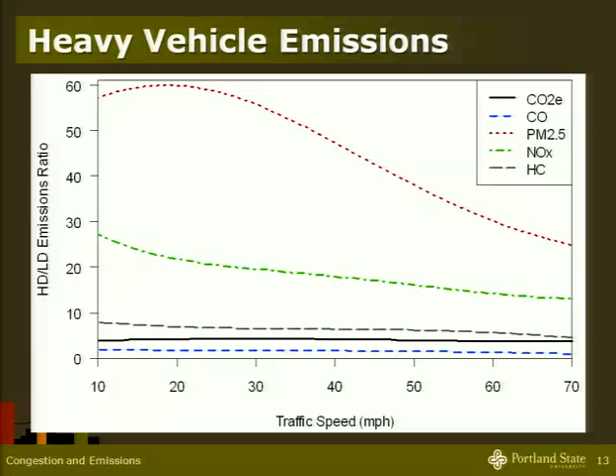This is not just because of the shape and weight of the vehicle—it's also because in the US, heavy-duty vehicles are dominated by diesel fuel, whereas our light-duty fleet is dominated by gasoline. So part of this is vehicle body and engine differences, and part is fuel differences. But there are much higher emissions rates for PM and NOx from the heavy-duty fleet than the light-duty fleet. Also, by the downward sloping trends of these curves, you can see heavy-duty vehicles are more sensitive to congestion—as congestion sets in, their emissions rates go up more proportionally than light-duty vehicles' rates.

Now, how does that impact their role in the total picture? Here we're assuming heavy-duty vehicles are about 10% of the fleet, which is fairly typical on, say, I-5. So if heavy-duty vehicles are 10% of the fleet, here's the fraction of total emissions coming from that sector. We see 85 to 90% of the particulates are coming from just these 10% heavy-duty vehicles, about 70% of the NOx, and almost half of the hydrocarbons. So a lot of the local pollutants are coming from heavy-duty vehicles.

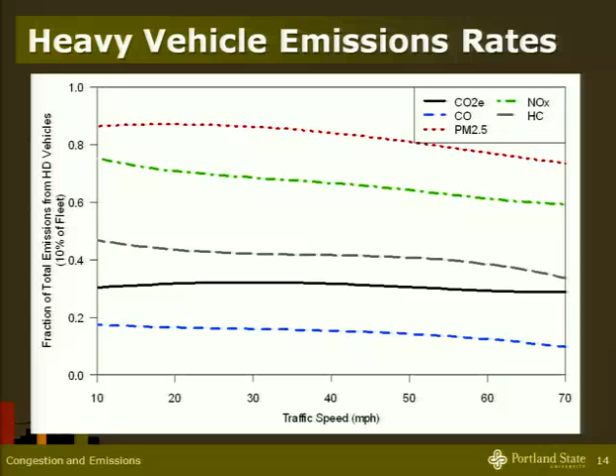So all these sensitivities have led to suggestions for class-based strategies to reduce emissions. This isn't just for emissions motivators—there are other reasons too, like differences in value of time and mobility needs. But there are certainly opportunities for class-based traffic management strategies to reduce emissions better than just general-purpose traffic management strategies.

Here I present results from a sketch analysis study using a typical three-lane freeway, looking at 4 different ways to manage these 3 lanes. TOL is a truck-only lane, dedicated for heavy-duty vehicles, and general purpose is a mixed light-duty, heavy-duty facility. So for these three lanes, we have 4 possible strategies.

The first is a truck-only lane conversion: we take away one general purpose lane and replace it with a truck-only lane, giving 2 general purpose lanes plus a truck-only lane. The second is adding a 4th lane and making that a truck-only lane. The third is adding a general purpose lane, giving 4 general purpose lanes. The 4th is removing a general purpose lane, going down to 2 general purpose lanes.

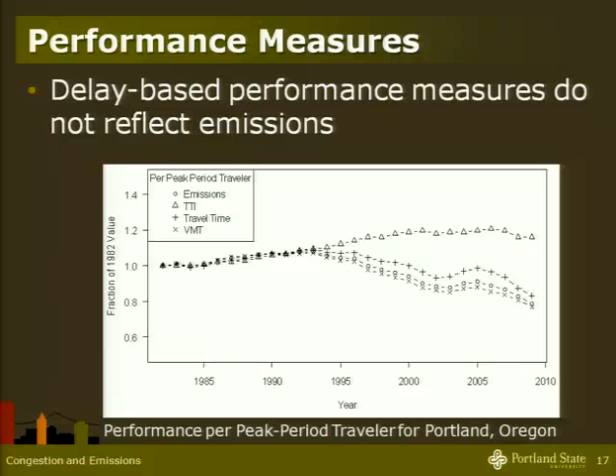Because the changes in efficiency at a wide range of speeds is small, that's only going to have a marginal influence on total emissions, whereas total emissions are very responsive to changes in the amount of travel. So changes in VMT are clearly more reflective of changes in total emissions than simply changes in speed or delay. Congestion performance measures are not fully, or not very well, reflecting emissions changes.

It's fairly easy to see graphically that there's a much stronger relationship between total emissions and the amount of travel than between total emissions and speed, or total emissions and delay. That's because speed is only having small marginal influences on emissions, and it's the amount of travel that's really driving the total emissions value.

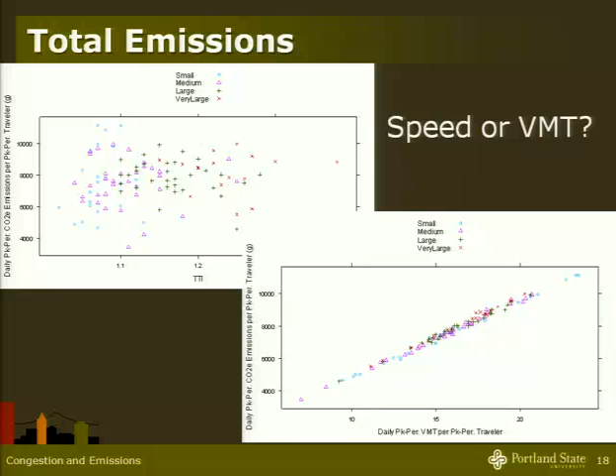Decreasing congestion levels increases speed, decreases emissions rates, and decreases total emissions if you're only looking at the efficiency effects, but you're leaving out a lot of the impact of congestion.

That brings me to something much more recent, ripped out of last week's headlines. There's a recent report from Harvard Center for Risk Analysis looking at the health effects of motor vehicle emissions. This is from a website talking about the report. They say emissions from traffic congestion cause 2,200 premature deaths annually. So they're saying emissions from traffic congestion are causing that — which naturally ties into my research.

I was like, well, how did they calculate the emissions from traffic congestion? What is their base case? If you go in and look at the methodology, they're not actually calculating the emissions attributable to congestion. They're just calculating the total peak period emissions. So really they're looking at the total amount of emissions, and the word 'congestion' really shouldn't be in there because they're not estimating the effects of congestion — they're estimating the total effects of emissions from vehicle travel.

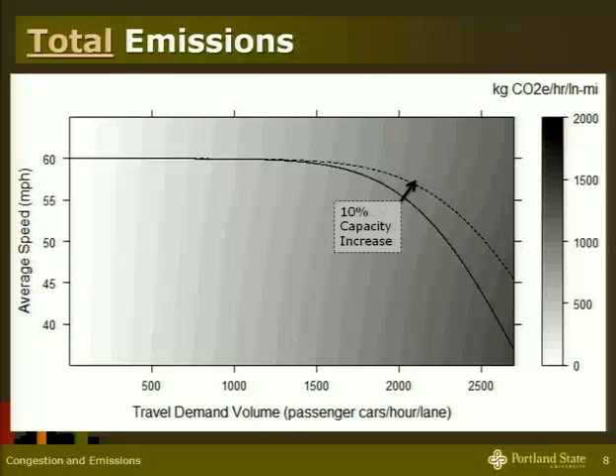Can we go back to that slide? On the far left, the part I don't get is that if it's 20 miles or less and the emissions are just spiking, all those bad gases, doesn't that mean that when people are stuck in traffic, it's generating more pollution per travel mile? Especially in a commuting situation.

Yes, more exactly per travel mile, and that's the issue. If we're normalizing to the amount of travel, then yes, our emissions are going up. But if we're looking at total emissions, not normalizing to travel amount, it becomes more complicated. The efficiency is going way down at very low speeds, and that's why there's good potential in this region for all these pollutants, because efficiency dominates. But across a wide range of moderate speeds, the travel-induced demand offsets it.

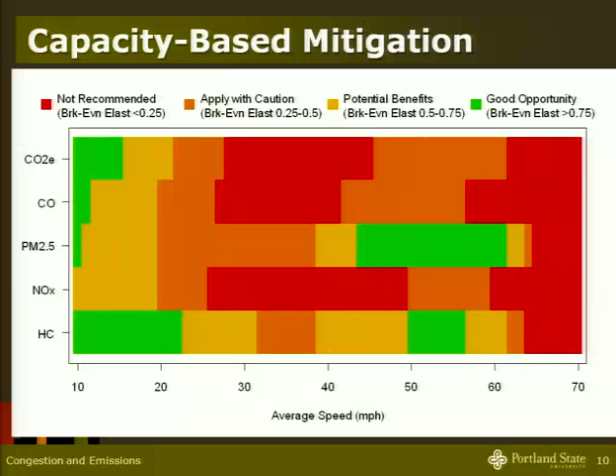That was a really great presentation, excellent work. My issue is with the conversions or adding truck lanes. Aren't you rewarding the worst actors in the system? You're making life easier on the people contributing the most to the problem. Can't we think of a stick instead of a carrot that makes people drive off-peak, do their deliveries during times when traffic congestion isn't bad?

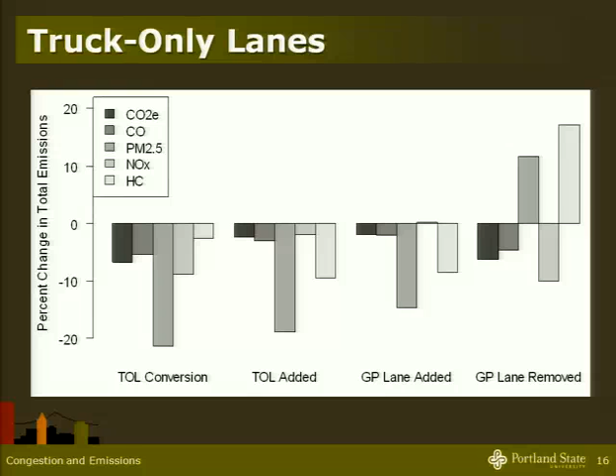Taxation, maybe? I don't want to get too much into what policy approach we should take, but there are certainly a lot of approaches we can take to congestion, and I want to be careful with rewarding or punishing, because we all need the transportation system and we're all using it. There are certainly policies that incentivize certain behaviors, and policies that disincentivize other behaviors. I think this is an example where you have a mix, where by managing our lanes differently, we're changing travel times, which incentivizes travel for trucks and disincentivizes travel for light-duty vehicles.

If you have a congestion pricing system or a VMT tax or some sort of system like that, the elasticity of demand is the net change in demand—the total change in demand. So with a system like that, you can actually reduce the induced demand effect and have an effective lower demand elasticity. You have a better chance of being under these curves if we have a congestion mitigation program accompanied by a congestion tax, where we're increasing efficiency but also disincentivizing travel monetarily to try and have no induced demand. So we can change our effective demand elasticity downward through some of these disincentivizing policies.

Thank you. Or Kelly, did you have a question?

No. Okay, behind Pam? That kind of gets to my question, which is: do heavy-duty trucks have the same elasticity levels as passenger vehicles, given that they're traveling for work, have very different reasons for being on the road, and are influenced by all of our consumption levels, which is a totally different model?

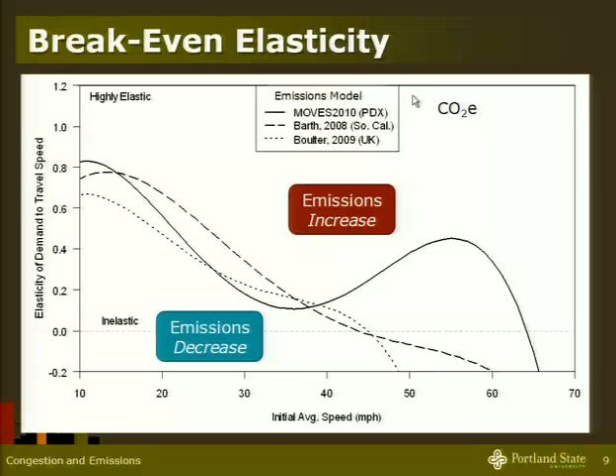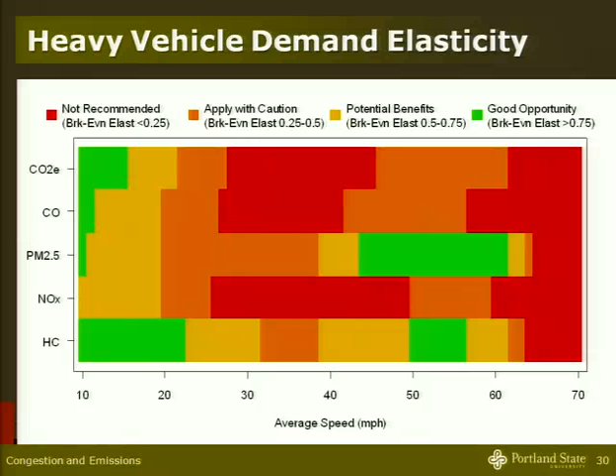If I may, I actually looked at that a little bit. Remember this slide, I said, okay, what happens if freight demand is inelastic to travel time, either because it's intrinsically like that, or we've put some sort of a toll along with our congestion mitigation to eliminate induced demand for heavy-duty vehicles. Here's what the picture looks like for inelastic heavy-duty travel demand - a lot greener overall, a lot more potential for emissions reductions due to congestion mitigation if we can eliminate induced demand from the high-emitting heavy-duty vehicles. Thank you for the question and the opportunity to show my extra slide.

I think Pam, or did you want to follow up?

I just would like to add something - I think freight is very diverse, like Alex said, and you could think about, you could just move gravel and rock or move computers. So the value of the shipment, you have a huge range in terms of value, so the response, the elasticity is all over the place, and it's very, very hard. I think Alex tried to say this - we're just trying to analyze and understand what's going on, so the right policy makers can make the right decisions. And there is a huge range of options, and I don't want to say that freight is guilty, because it's necessary for the economy, and there are not so many options available, unfortunately, in terms of alternatives. So just wanted to make that point, we are not just saying that we should reduce freight or that freight is responsible. It's just with the current technology, unfortunately, this is what our economy is depending on, the way it works.

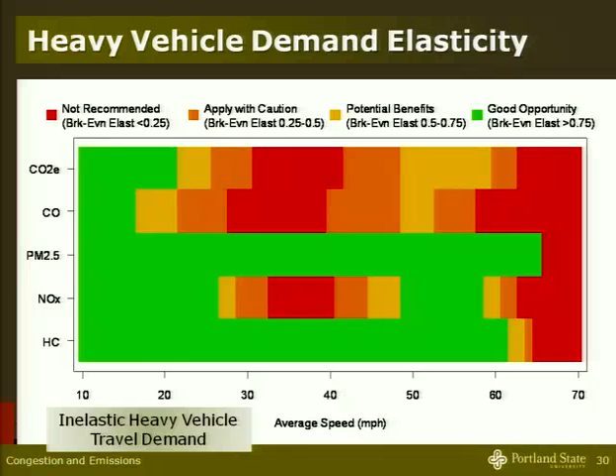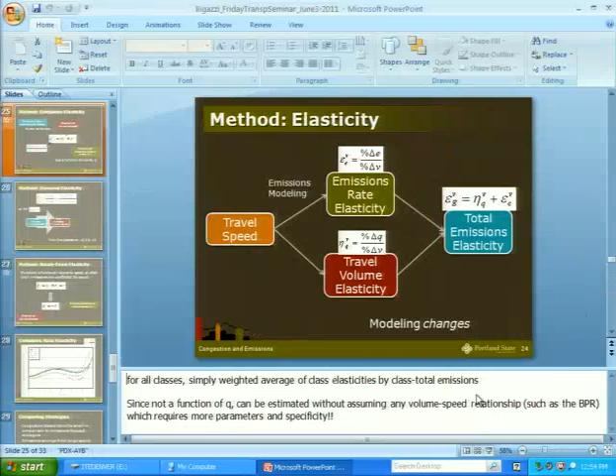After looking at your slides on the urban mobility report and the strong relationship with vehicle miles traveled, could we go back to your earlier slide showing the funding priority breakdown for CMAQ? I'm curious about their land use priority. Is land use on there at all in terms of reducing miles traveled? Let me see—can you give me an example of a project, since this is about funding projects? Like research or regulatory measures to increase density, things like that.

If there have been those projects, it would probably fall under demand management, although most of the demand management projects I saw were telecommuting, carpooling programs, and things like that. I'm not an expert on CMAQ—the list of projects is available, and it would be interesting to see a more detailed breakdown. I think when Atlanta had to form GRTA over their non-compliance with air quality, they were trying to get credit for land use policies, and this was a challenge—how do those fit into this funding arena and get credit for the benefits. I think it's something that's evolving.

One of the hard parts about doing that would be showing an expected benefit on both sides, because they've been tied together like this.

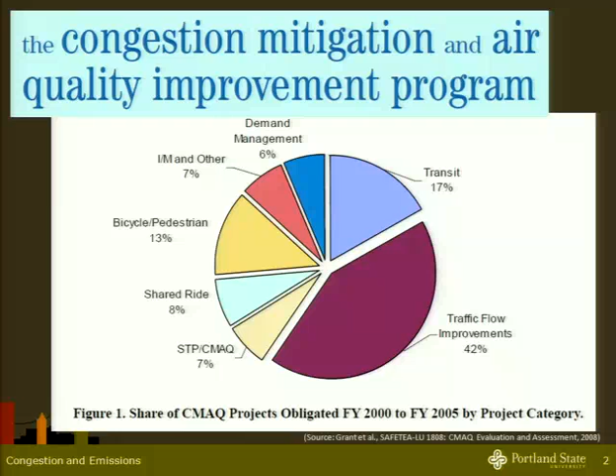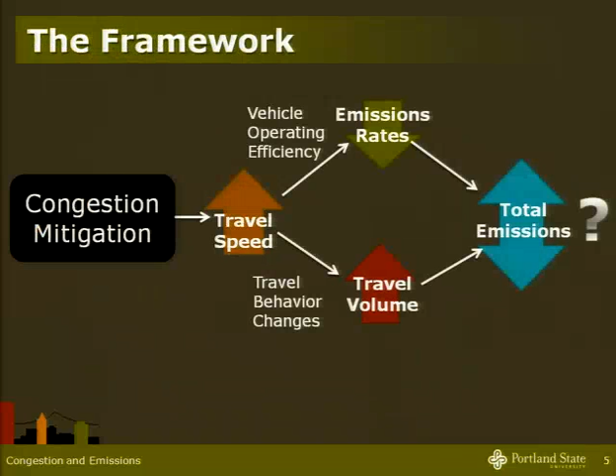But related to other countries' approaches—through a lot of this research, when I say congestion mitigation, colleagues in the U.S. typically think of traffic flow improvements and capacity expansions. Colloquially, that's really what we mean—capacity or throughput improvements. When I mention my research to colleagues in the UK, I always have to say capacity-based congestion mitigation, because to them congestion mitigation first implies demand-side congestion mitigation with additive benefits, since they're much more restricted in their ability to add capacity than we are. I'd say that in terms of the mental framework, they're more focused on the idea that travel volume drives air quality problems more than congestion does—which I think is perhaps a more accurate way of thinking about it.

Any other questions? Okay, great, thank you.